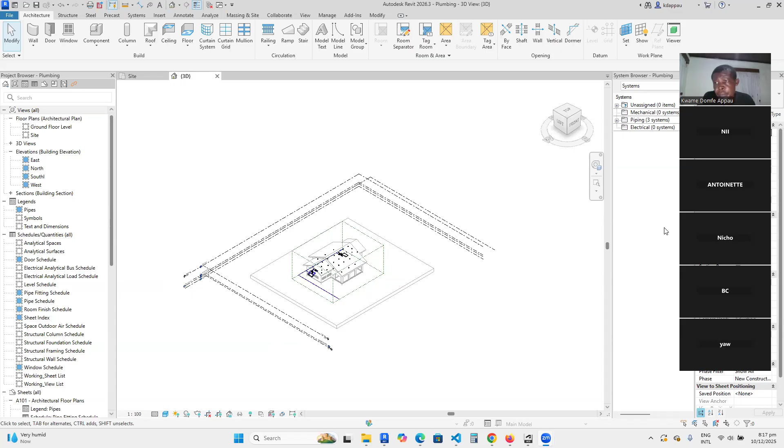Any question relating to what we did yesterday? Hello. Please, nothing from me. Okay. Any other question based upon what we did yesterday? Nicho? Yes, sir. Any question based on what we did yesterday? No, for now, I don't have a question. Any questions? So for now, no. Friday, Saturday, Sunday. So from there, I'll see what to do. Okay. Yeah, any question?

No, sir. Okay. Today, I want us to look at title blocks, because it's a very critical part of our work. We'll come back to the modeling and stuff. But I want us to look at how you can design title blocks and then how we can start populating our sheets, because creating sheets is very critical in the Revit project delivery process.

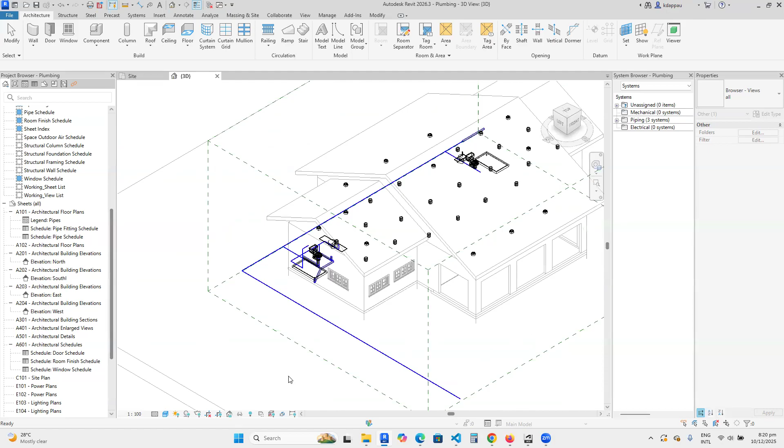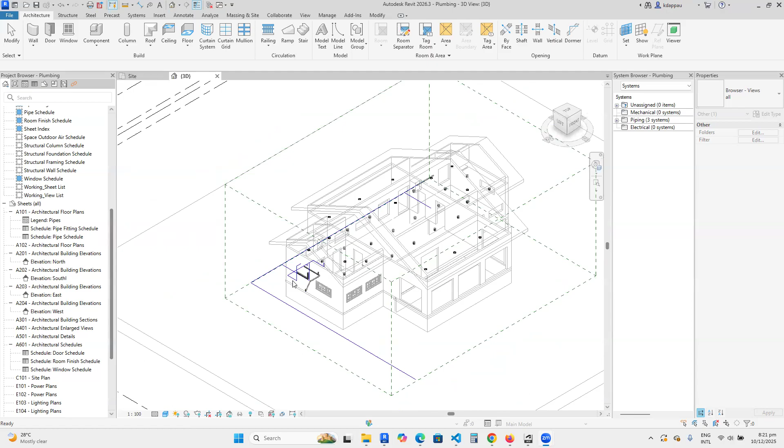Sir, please, I want to ask a question. The recordings that you have done, all that you send to us is on YouTube. So let's say I want to go to the recording day 1 or day 2 or 3, unless I go to YouTube to click on it. So that means if I don't have data, I can't go through it again. But you can download it from YouTube if you want to. If you go to YouTube, I think you can download it. Are you okay? I said you put it on YouTube, I don't have a problem about that, but maybe we can do something about it. You can easily download YouTube videos. I said you can download the videos from the YouTube channel. Okay. Yes.

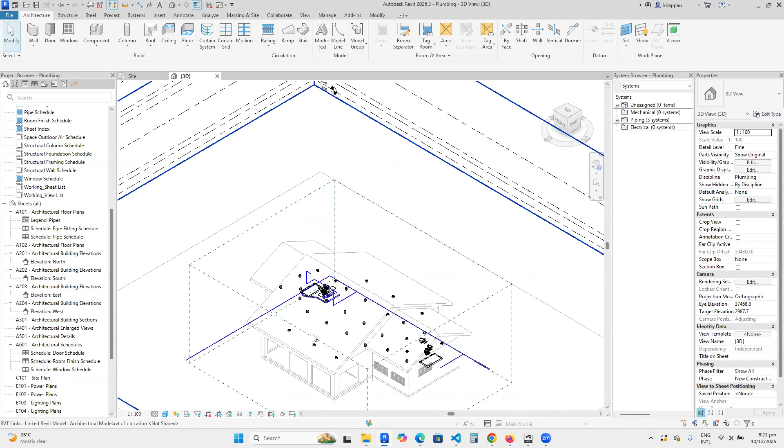Okay. I want us to focus on sheets today. How to create sheets, and then how to populate the sheets. But before you create any sheet, you need a title block. By default, Revit comes with a title block, like this one you see here. And this title block is not a title block that you can use. It's a sample title block.

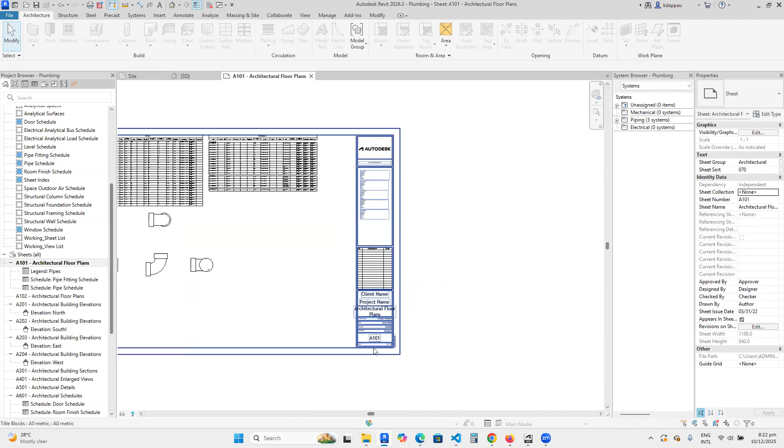But you should be able to create your own title block, and I want to show you how to create it. But I want you to observe something from this title block. If you zoom in here, we have project number here on the left, then another project number on the right. Date here, then issue date on the right. Drawn by, then author, checked by, and then checker here. Then we have this number.

If you click on this project number here, you can type it in. It's a label that you can edit. If you click on this date here, it's a label that you can edit. Author too is a label that you can edit. But what is on the left side here? You cannot edit it easily because it is a fixed text. The ones on the right are parametric labels, and the ones on the left are fixed text.

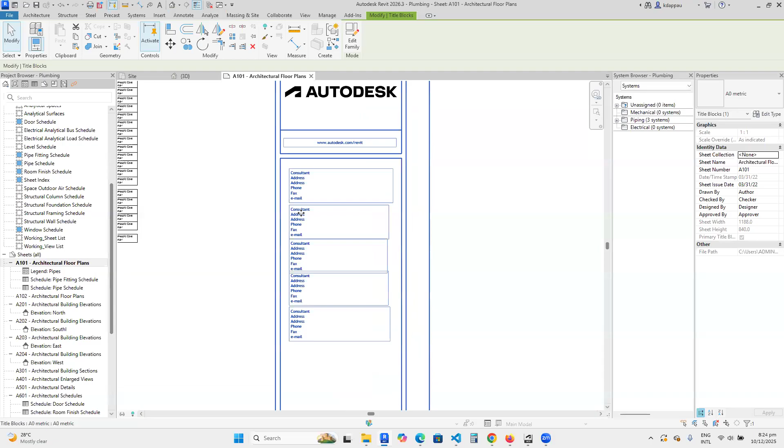This sheet number here is also a label. This scale here is also a label. Most of the content you see here is all text. You see, you cannot edit them here. When it comes to creating title blocks, text and labels are the two major things.

I've not been coughing the whole day, but I don't understand, when it gets to the evening, I start coughing.

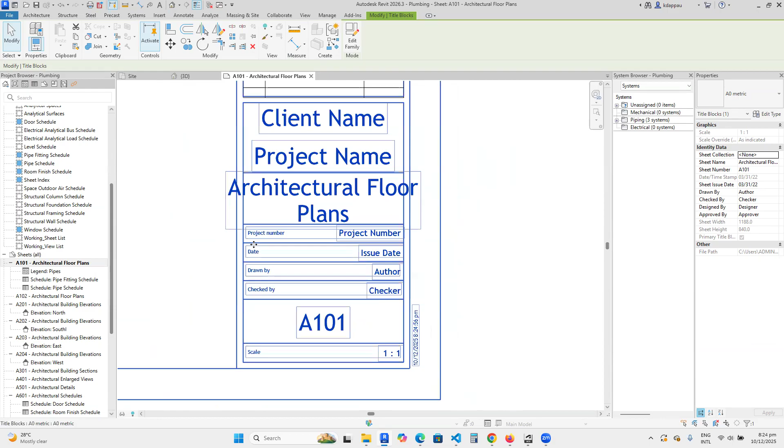The text and the labels are the two most important things you take note of. The labels are things that you can change from one project to another. The text doesn't change per project; it remains the same and fixed. So let me do a simple scenario to show you how to go about it. I'll not edit this one. I'll just start with a new title block.

I'm going to do an A2 title block to be specific. So I'll go to File, New Title Block, and I'm going to design a title block for the first time. I'll select this A2 metric title block and then go to Open.

It will open a blank sheet of A2 sheet size, as you can see. From here to here is 420 mm. From here to here is 594 mm. So it's the exact A2 sheet size that you want to work with.

And when we are working with Revit, we work with real dimensions. We don't scale anything. The only thing we scale in Revit are views and legends. We don't even scale schedules. We scale only views and we scale only legends. So with the title block, it's the exact same sheet size. But I'll not add anything. I'm going to add two things first.

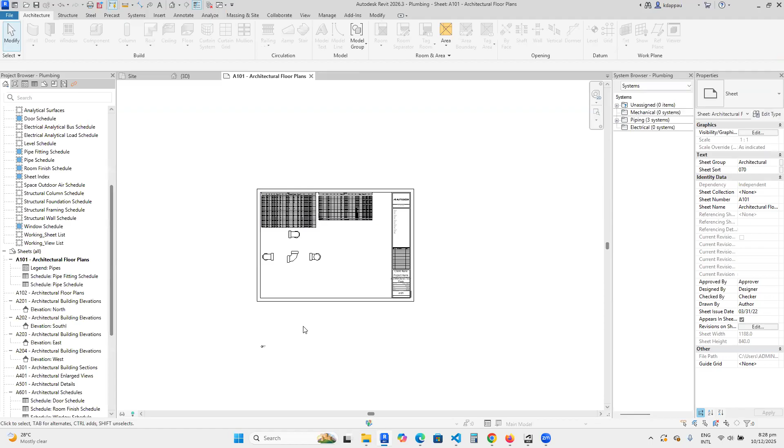So what I'm saying is that when you are designing any... Sir, please go back again from File. Okay. So I'll close it and start again. When you want to create a new title block, you go to File, New, and then choose Title Block. A dialog box will pop up. Make sure that it is metric, but look at the path: Drive C, ProgramData, Autodesk, RVT 2026, Family Templates, English, Title Blocks.

And you should see a default title block, A0 sheet, A1 sheet, A2 sheet, A3 sheet, A4 sheet. I want to create an A2 sheet, so I'll choose A2 metric. Then I'll choose Open. So it will open a new title block for me. And if you check the dimension, it's 420 by 594, the exact size of the title block.

And what I'm saying is that there are two things you should be concerned with for now. All the others will come in as add-ons, there to add value to the title block. But you need to understand two major things and the way they behave in terms of title block. It is applicable to all other tags that we look at in future. First one, I'll go to Create. And if you go to text here, let me bring my magnifier.

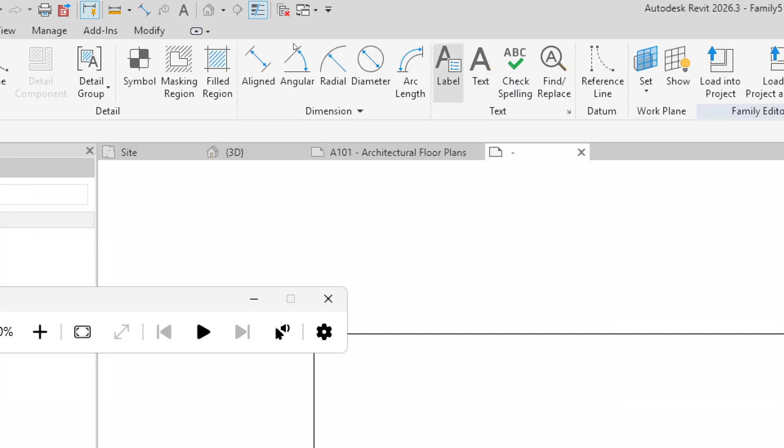Then increase it. If you go to Create text here, you see there are two things here, a label and a text. They all look like a text, but the label is parametric. This text here is not parametric, but the label is parametric. So I'm going to use the two of them for you to understand how it works. Okay, so I'll minimize.

And I'll go to Create Label. Watch closely. As soon as I click, I don't have the option to draw or to write any text, but I have the option to pick from a list, as you can see here. So there's a whole list of labels. These are all called parameters that you can load into a title block. So for instance, I can pick any of them, say client name, and then choose Add.

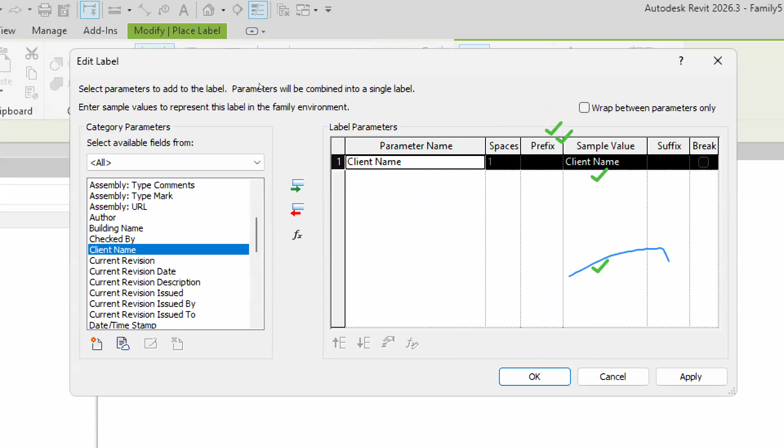When I add it, I'll get client name here. Then I'll go to OK. So you see that the client name is now loaded. Now let me minimize it again. This is a client name. This is a label. It is a text. It has a font type. It has a font name. You can give it a color. It has a font size.

But if I go in and then choose Create again and then pick Text and then click here, with the text option, I can type whatever I want. So I'll still type client name again. So I have two things: client name, and then client name. The only difference is that one is a label. If you select it, it's called a tag label. And if you select the lower one here, it's called a text, 8 mm.

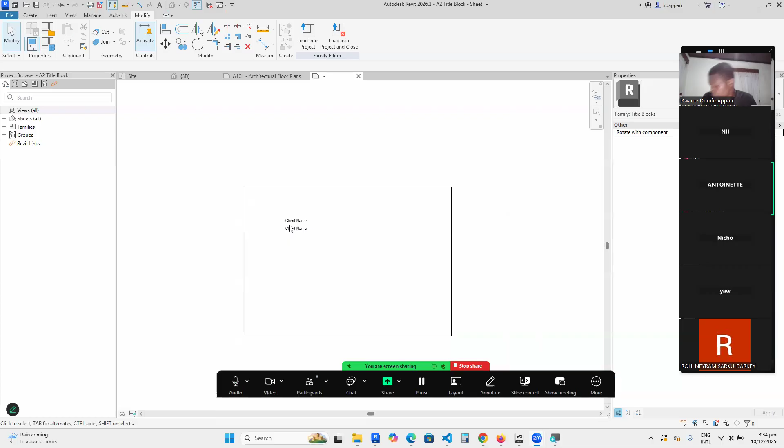So I've saved it as a file, A2 title block. Now I can load it into the project. So the title block is now loaded. So I can come and select this title block and then change it from the type properties, and then choose the A2 title block that I loaded. So that's the new title block that I've loaded. Let me shift it to the side.

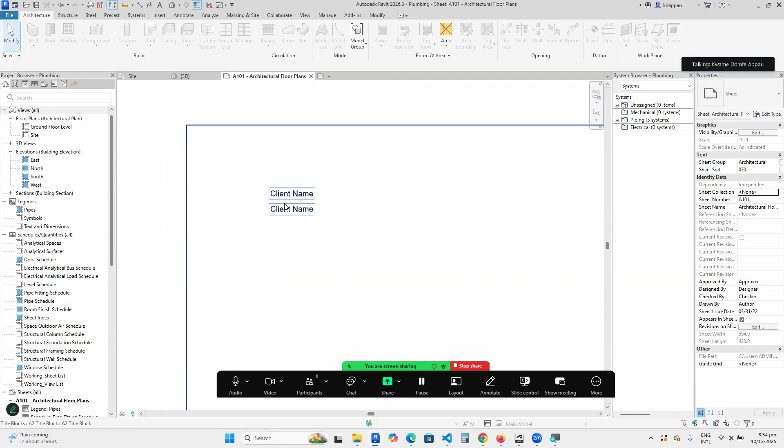This is a title block. You still see the two things here. Client name here, client name here. One of them is a text. The other is what? A label. The first one, if I click on it, we have client name, which I can edit. The second one is a text, which I cannot edit because it is not parametric, but the label is parametric. And because of that, I can what? Edit it. You understand what I'm saying?

Are you okay? Hello? Yes, sir. Are you with me? Yeah, we are. Yes, sir.

I'm okay. So know the difference between the two. At any point in time, you'll either be using a text or you'll be using a label. Know when you are using a label, know when you are using a text. This client name that you see here, if you select the title block, you should be able to see the client name somewhere and then edit it. But the question is, where do you find the client name to edit?

If you go to Manage and then go to Project Information here, you will see the client name here as a parameter. Let me magnify so that you can see. If you go to Project Information here, you will see the client name as a parameter, which you can edit. The project issue date is also a parameter you can edit. Project status is a parameter you can edit. Project address is a parameter you can edit. Project name is also a parameter you can edit. Project number is a parameter you can edit.

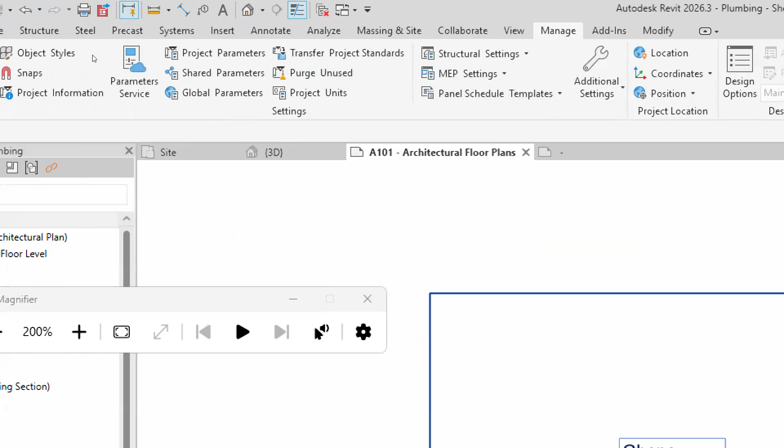If I click here and then I type in a different name and call it, let's say, Ghana government, for the client name here, it will change to Ghana government. If I go to the project information and check, you see that the name will change to what? Ghana government.

One thing I want you to understand about labels is that when you create a label, you can change the name of the label in different places and everything will be updated within the project. If you don't use a label and you use a text, it limits you. You can only change the text at the place where you created it and edited it. Any question? Any question, please?

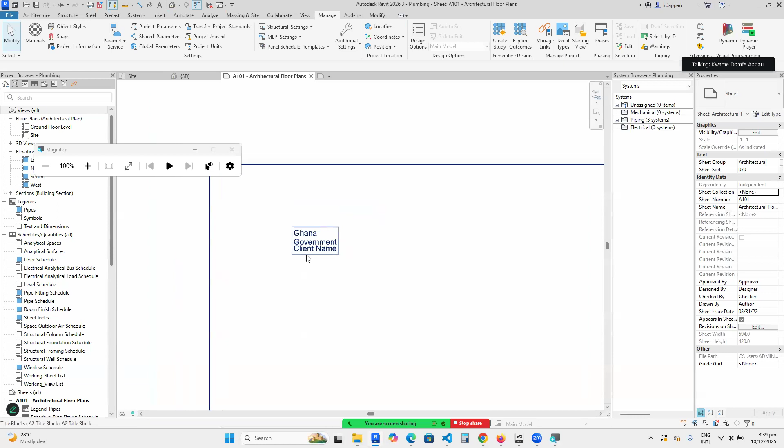No question. Now, the next thing that should concern you is this. Whether it is a label or whether it is a text, they are all text. So you can edit the font sizes. You can edit the font type. You can edit the font color. You can do anything to the font and then present it in a manner that will look presentable the way you want.

So if I select the title block again and go to Edit Family here, and I select this client name, which is a label, we have the label, then you can edit the type. This Edit Type properties gives you an opportunity to edit the structure and form of this one. So the font size, for instance, is currently 8 mm. I can duplicate it and then do, let's say, 24 mm.

But it is not only the font size you are changing. You can change the font type also. So instead of it being Arial, I can say 24 mm space bar Tahoma. You can choose any font, the kind of font you work with and you are comfortable with.

So I'll choose 24 mm Tahoma for now and I'll go to OK. So there's a new system type label called 24 mm; there's 8 mm, there's 12 mm, and then there's 24 mm Tahoma. So I can change the font from Arial to Tahoma. I can change the size to 24 mm.

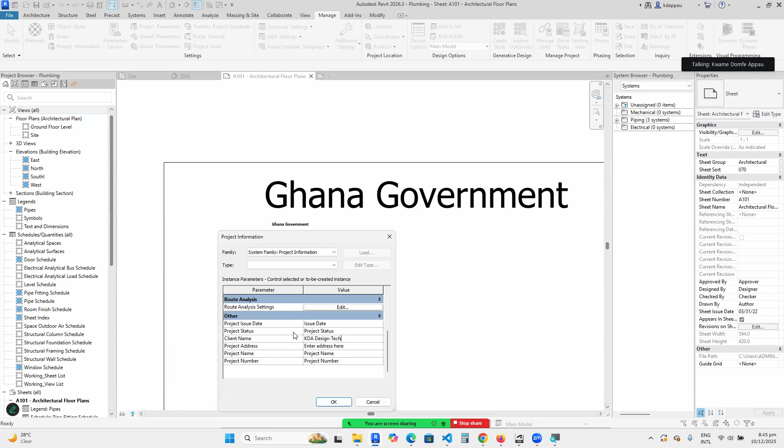So if I go back to the manage tab, go to project information, and then change the name from Ghana government to KDA Design Technologies. I'm not editing it on the title block at all. I'm editing it in the project information dialog box.

But as soon as I click OK, both of them will update to KDA Design Technologies. This one also updates to KDA Design Technologies because the two of them are parameters. But this client thing here is a text, so it doesn't change at all.

Any question? Any question? No, sir. Okay, you're okay.

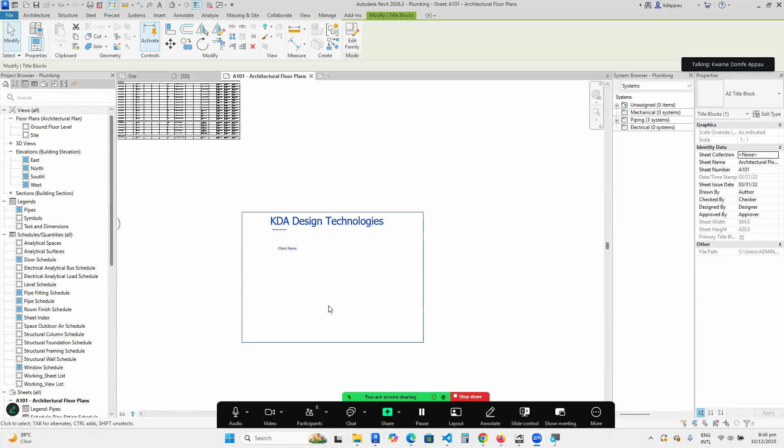Yeah, good. Now, when you are designing a title block, we work with so many parameters on a title block. You enter so much information about the project: client information, project information, site information, consultant information, the team of people who worked on the project, designed by, drawn by, you enter dates, you enter scale, you enter so many things.

So you must take your time and bring all those labels inside the title block as and when you need them. Depending upon the title block that you are going to design, you might need one label or the other. Then when you bring the labels inside, you can change the font sizes, you can change the font colors, you can change the font weight.

That is where your design ability comes in. You can design the title block in any manner to suit the way you want it. Any design that you can do in AutoCAD, you can do in Photoshop, you can do in CorelDRAW. I can assure you, you can do the same thing in Revit by just changing the font sizes, the font weight, the font colors, and so on and so forth.

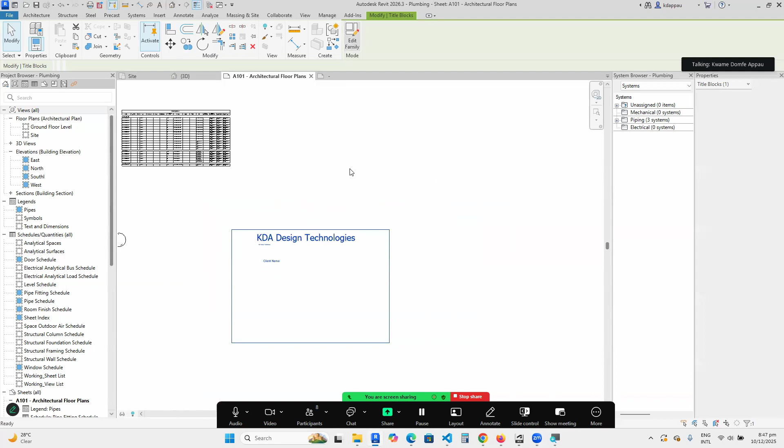So I'll go in again and I'll go and edit the family again. So if I come in here, I can take this client name and bring it to the left. I want to do a vertical title block here. So I'll take this title block. Let's say I'll draw a line from here to there. I want the distance from here to here to say 100. So everything will fall within this space.

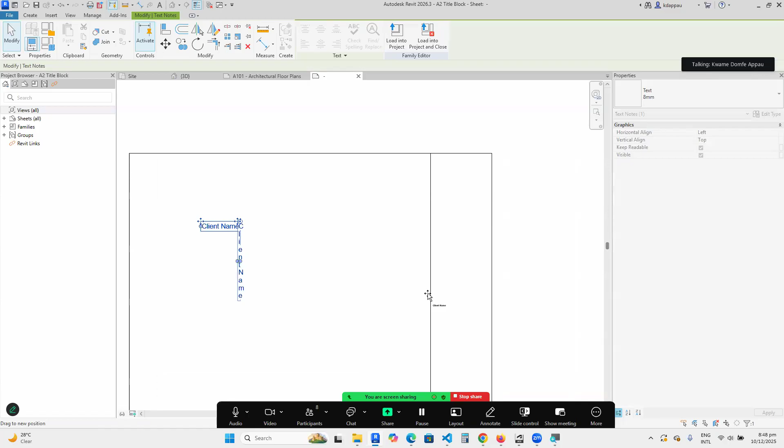So I can bring this client name here, then select it, pull it back to fall within this space. That's the client name. I'll delete this one. Then I'll take this text, bring it here on top of this client name. So if I bring it here, this is a text. The font is big, so I want to reduce that one to 2.5 mm.

So I'll go to edit type. System family is a text. The type is 8 mm. You also have 12 mm. Then you have schedule default. But I want a smaller size, 2.5 mm. So I'll duplicate it and then give it 2.5 mm.

Then I'll decide the font I want to use. I want to use Arial. Then go to OK. So I'll come in here. The font is Arial. The text size is 2.5. Then I'll go to OK. So I have this text here, which is 2.5 mm. Then I have this client name here, which is also 2.5 mm Tahoma bold.

So now, if I load into the project and I overwrite, I'll see my line that I added. I'll see my text for the client name. Then I'll see the label depicting the client name.

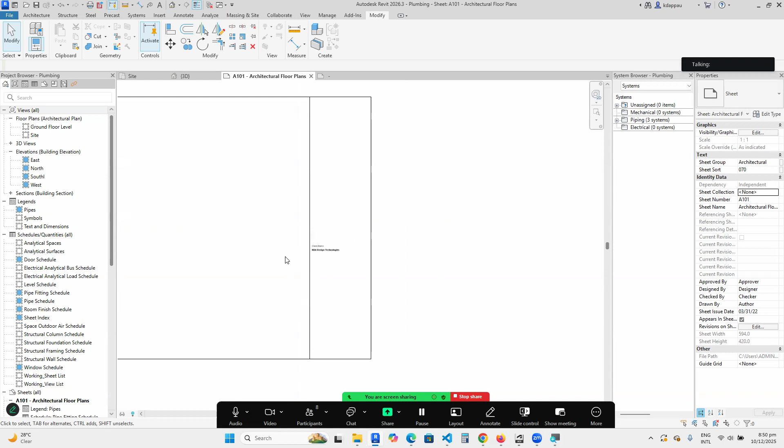Now, if you watch it closely, I have this client name here, then I have this client name here, which I can edit. But for a title block, the information comes in different blocks. So you can have client information, client address, client telephone number, client email, whatever information about the client that you want, you can bring them in.

So, sorry. What kind of sickness is this?

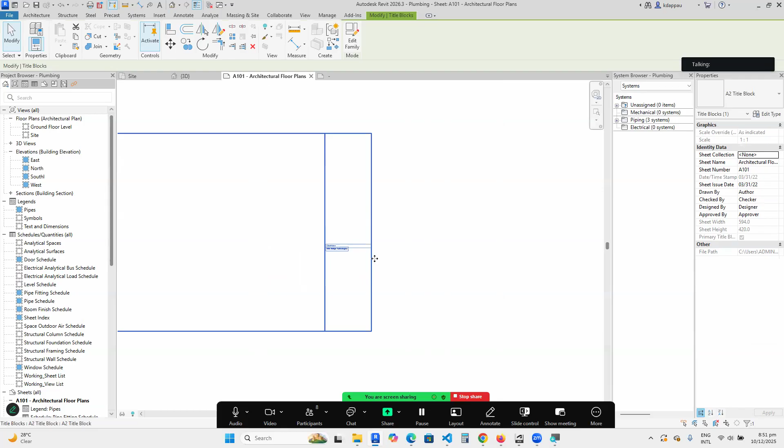I'll select this title block, go to edit again. Then I can bring in more labels. This one is a text. This one is a label. I can go and click create new label and click. Then it asks me to choose from the list. So if I go to here, we have

author, building name, checked by, client name, designed by, drawn by, file path, and so on. Project address, project name, project number, project status. I can pick any of them, let's say project name, and then choose add. When I add it, the project name will also come.

When I select the project name, the text font sizes that I've already created are available here for me to choose from. So I can choose 24 mm Tahoma. I can choose 2.5 mm Tahoma bold. If I want a different font size, I can edit type, make a duplicate, make it 5 mm Tahoma bold. Okay, then I'll come and change the font size to 5 mm, and it's Tahoma bold.

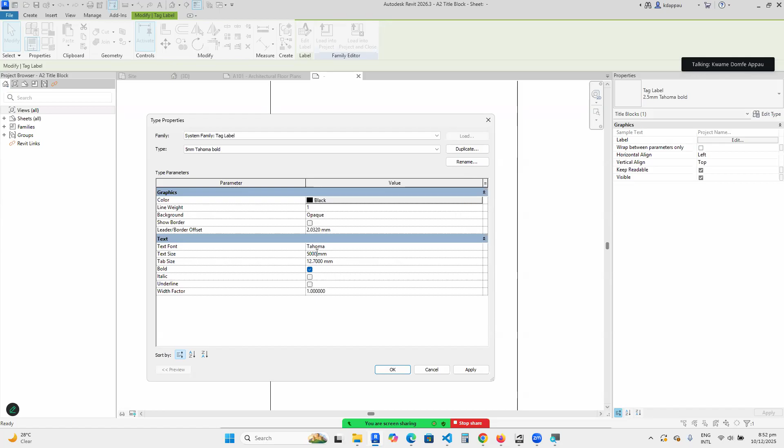Then I'll go to OK. The value is out of range. I typed 5 mm... I made 5,000. 5 mm Tahoma bold. So I'll go to OK. So now this time around, this one is 5 mm, and it's a label.

So as soon as I load it into the project and I overwrite, I'll see the project name here. This project name is the same information that I'll see in the project information here as project name, and it's the same thing. So if I change the project name here to proposed residence, I go to OK, I'll see the proposed residence here.

I can click on it and then edit it. Or I can go to the title block here. I should be able to see it on the title block. If I select this title block, okay, it's not giving me here. Sheet name, sheet number, okay, it's not here. So you can click on it here and then edit it here.

Now, if you write a proposed residence, you need to put a text here to describe what this proposed residence is. So I'll go into edit family, copy this text, which is not a label, Ctrl C, and then bring it down. And then change this one to project name. Some people write it project, some people write project name. Please, at your own discretion, do whatever you want. You can bring a colon at the back of it and then get the project name.

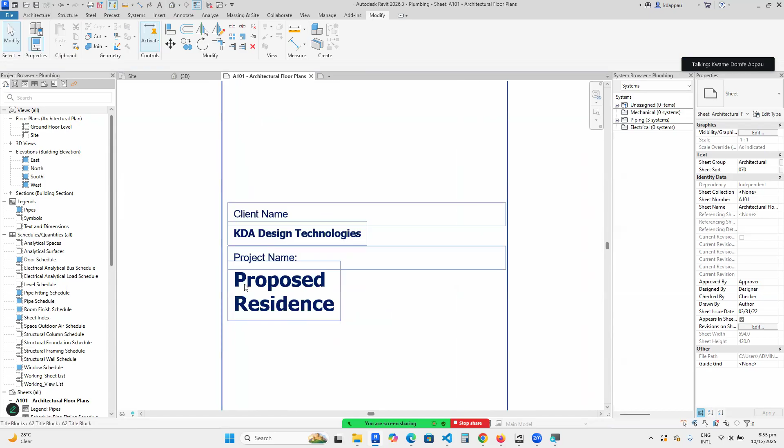Then when you save it and then load it into the project, overwrite, you see that the project name will appear. This proposed residence is falling into two lines. If I want it to be one line, I'll select it, edit family, and then pull it to the end. Now, when I load it into the project and I overwrite, I get that. Any question?

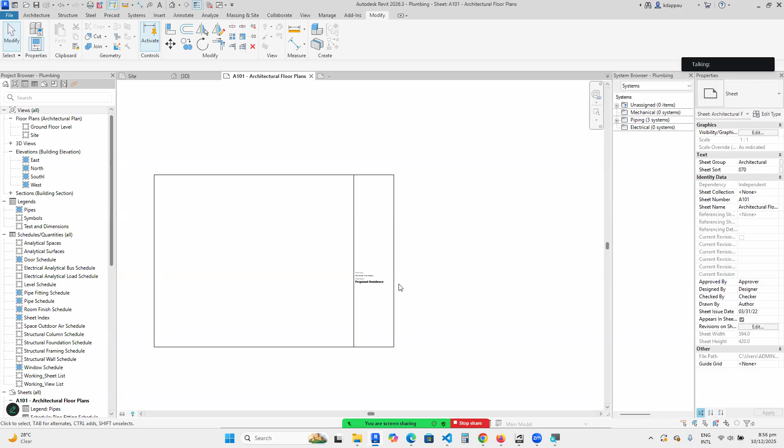Right now, I've added two parameters, one for client name, one for project name. I've added just only one text type, and I've made two instances of it, one for client name, one for project name. Any question? Any question?

Yeah. Yeah. Are you okay? Yes, sir, I'm good. Rohi. Are you okay? Rohi. Bakofi. Bakofi, are you okay? Yeah, we are okay. Ni. Sir, are you okay? Yes, sir. Nico, are you okay? Hello, Nicholas. Nico. Nico.

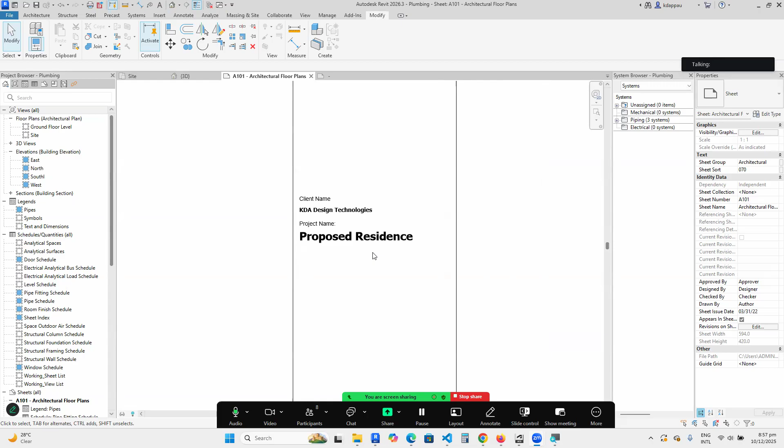Okay, let me continue. Now, if you are designing a title block, you need so many things in a title block. The client name, project name, the designer, the person who drew it, drawn by. In AutoCAD days, we have the check by and those things. In Revit, you don't have the check by. Nobody's going to check anything because it's the same team that is working on it.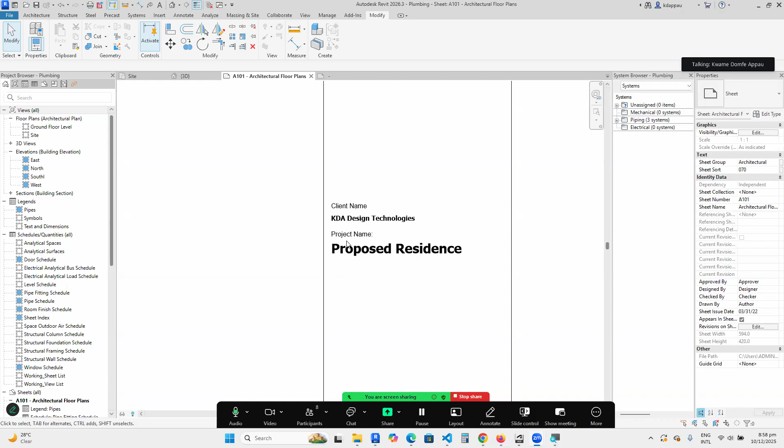In AutoCAD days, when you finish printing the work, somebody will have to sit down and then go through the work and check and make sure that everything is correct. But in Revit, you don't do that. So adding those checked by doesn't make sense of late. Then we update information. So what I'll do is that I'll go to edit. And then this text here, because there's a colon here, let me add another colon here.

Now I can copy this one, CO, and then bring it 1, 2, 3, let's say 4. I'll just do 4 items more. So what I'll do is that I'll call this one sheet name or sheet number. Sheet name. This one will be sheet number. This one will be scale. Then this one will be project issue date. Issue date.

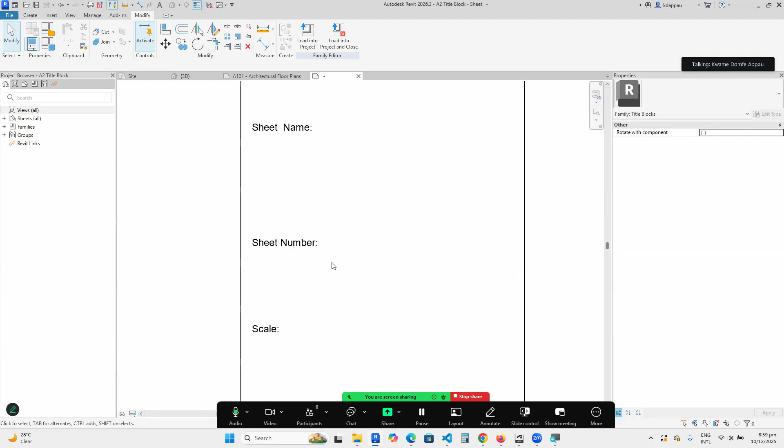And these ones, I'm just using text to describe what I want to do. And for each of them, I might bring an accompanying label for the sheet name, a label for the sheet number, a label for the scale, a label for the project issue date, for all of them. So I'll go in and then choose, this one is a label. So I can copy this label, CO, bring it here, bring it there, bring it here, and then bring it there. So that when I select this label, instead of the label being project name, I should change the label to what? Sheet name.

So I'll go to edit label, take the project name, remove it, go through this list, look for another label called what? Sheet name. And it's arranged in alphabetical order. So if I go to S, I should see sheet name here. Then I'll add. Then I'll go to OK. So now the new label here is called sheet name. This one here is a sheet number. So I'll select the project name, edit label, remove the project name, look for sheet number, add, and then go to OK. Come in here, project name here, it's not project name, I want a scale.

Edit label, remove the project name, go and look for scale, add scale. Sample, you can give a sample value. Let's say 1:100. Then go to OK. So that will give me the scale. And then project issue date. Edit label, remove the project name, and then look for project issue date. Add. Then go to OK. So your project issue date.

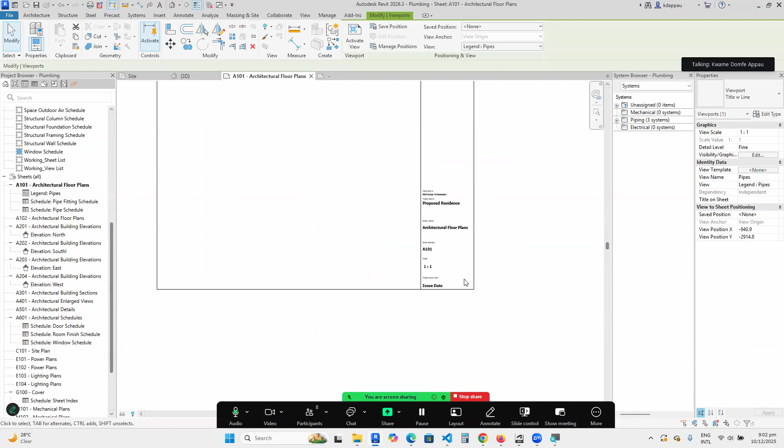Then project issue date. We've not specified the project issue date. So you can click on it and then type the date. Or you can go to manage project information, look for the project issue date, and then type in the date you want. And the date is say December 2025. Then go to OK. Then to automatically update, you can click on it here, edit it, and then make it capital letter.

So this is what you need to design a title block, labels and text. Any questions before I add on?

Any question? Rohi. Rohi. Paa Kofi. Me. Yeah, are you okay? Yeah, we are following up. They're okay. Yeah. So I'm okay. Everybody's okay.

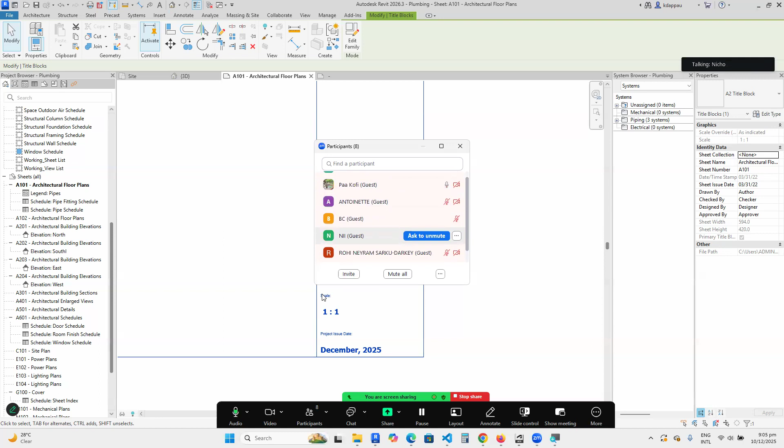Nico. Nico. Are you okay? Oh, I'm okay. You're okay. Okay. Now, all right.

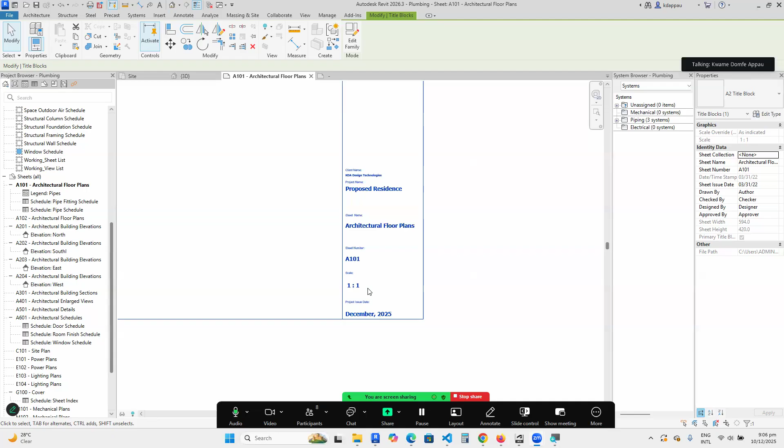Labels and text are not the only thing that you can add to a title block. You can add other graphical elements to make your title block more interesting: line work, hatch patterns, filled regions, images, schedules. Anything that you can add to make the title block more interesting, you can do that.

You can play with different font sizes. You can play with different colors. Currently, all the fonts are all black. You can make some of them colorful, blue, red, yellow, anything that you want. So let me start with filled regions or line work. I can go to edit family again.

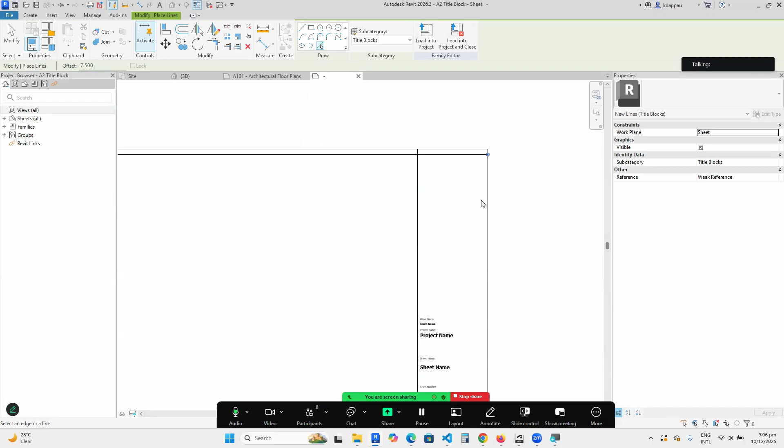Now, if you look at the title block, this is the overall size, 420 by 594. I'll offset it, create line work, choose the pick option, offset it by 7.5 mm inside, this way, 7.5, 7.5, 7.5. I'm going to bind it on this side here, so where I'm going to bind it, I'll make it about 15.

When I finish, I can trim it. Trim to corner, this and then that, this and then that, then this and then that. I can extend this one to that. Now, if you look at the outer line, that is the exact sheet size. I don't want it to be printed for any condition. So I can tab it, select all of them, go to the subcategory, and make sure that it is invisible line, so it's grayed out. And in that case, it will not be printed.

Then I can have this line work here. This line work, I can bring it all the way up here. So what will be printed will be what falls within this set of lines, as you can see. So I can select all these text here and then move it up a bit to fall inside this one.

I can go and create more line work by separating project issue dates, the scale, the sheet, the client, and then this one, so that they are grouped by date, by scale, sheet information, project information, and then client information. I can move the client information up a bit. Then move this line up a bit.

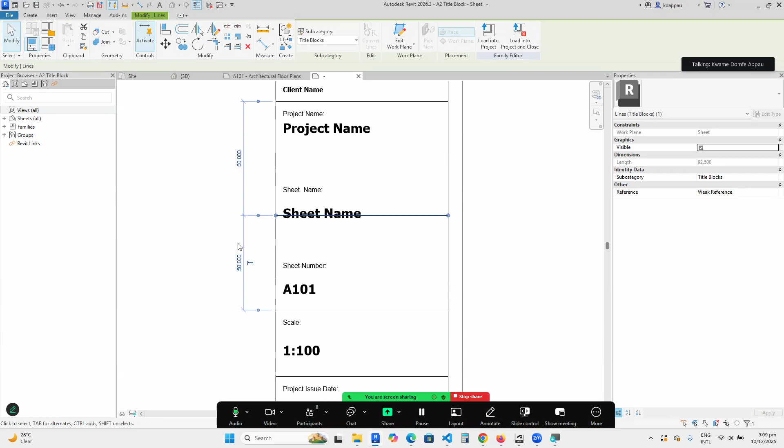If I am working, I give correct values between the spacing, let's say 30 mm, let's say 35 mm. From here, instead of 80, let me make it 75, or let's say 50. So that I can bring the sheet number and the sheet name down.

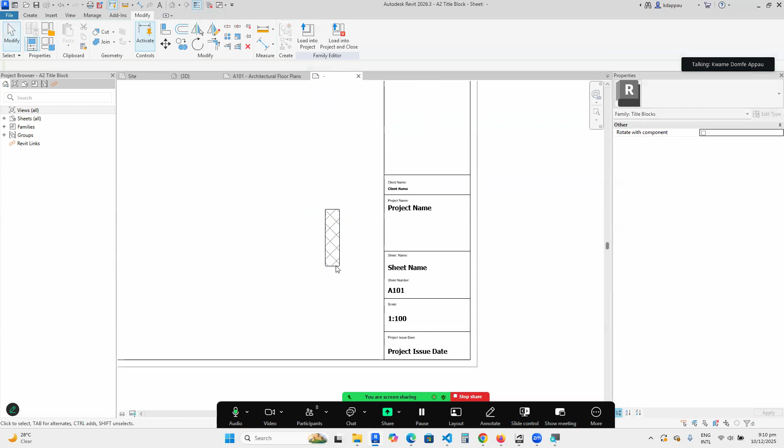You can edit the pattern. So for instance, it's filled region 1. If you go to edit type, you can make a duplicate of it and call it solid. And this solid, you can give it any color. Let's say red.

So the filled region, instead of diagonal crosshatch, I'll click on it, click this button, change it to solid fill. Then the color, change it to red. Then go to OK. Go to OK. So I have a red solid fill. This is a filled region. I can select it, create similar.

Then draw a filled region up to here, red. Give it the thickness I want. Let's say 2 exactly, or 1.5. When I finish, it will give me a filled region of red. I can copy it. Bring it here, bring it there, bring it here, bring it there.

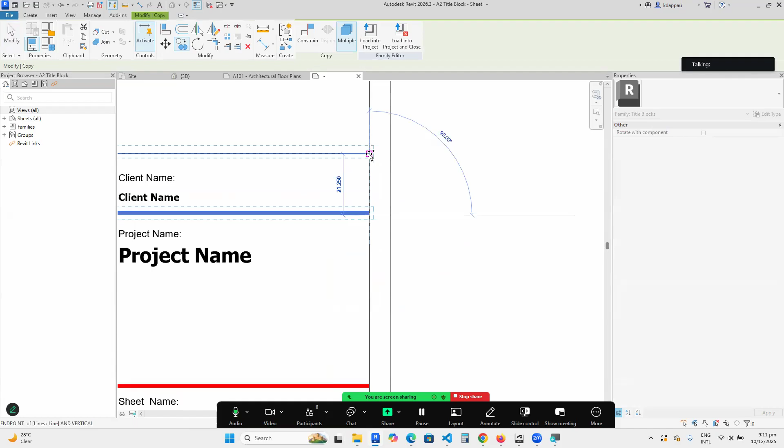If you want gray, you can take the filled region, copy it. Select this one, edit type, make a duplicate of it, call it solid gray. Change the color to gray. Go to OK. Go to OK. So it's now gray color.

So I can select this one, control, select that one, select that one, select this one, select this one. All of them are selected. Then change it to solid, gray. Then everything will be gray. I don't need this one. If you want to do it big, or you want to put it at the corner, select this, create similar. Then you can draw any shape you want.

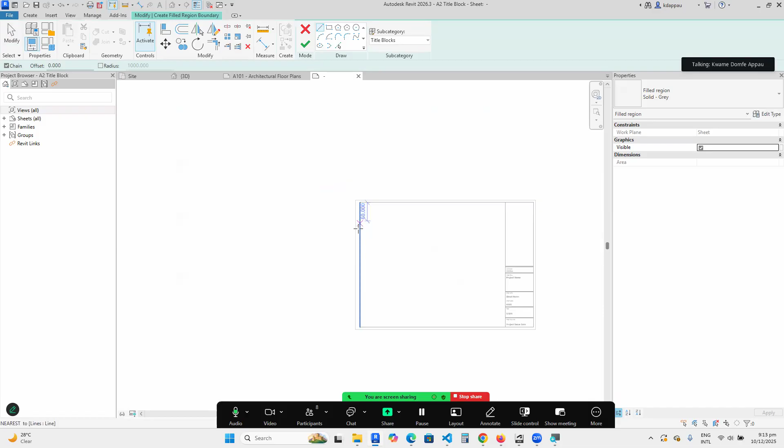Please, the title block should look professional. You can go to Pinterest and then look for title block design samples, and then work it out to look nice. Don't do anything shabby. It should look professional. So I can pick a rectangle, draw some small box here at the corner. I'm not saying do what I'm doing. I can come in here, put a small box here at the corner.

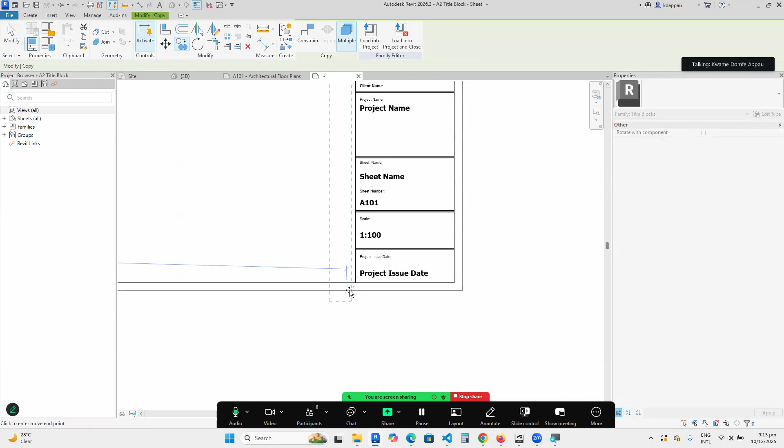When I finish, I have something gray here, something gray there. I can take this gray box, I can copy it, CO, copy from here, can put it at this corner here. So any graphic you want to work with filled region, you can do that and then add it to the title block. Any question?

No, so far I have no question. Yeah, I think I'm okay.

Okay. So you can design your title blocks. As simple as that. The next thing is you can also bring in an image. Maybe you have a logo you work with, a company logo, or your personal logo you designed as an image. You can go to insert menu. When you go to insert, you can import image. Import image. Then you can go to desktop,

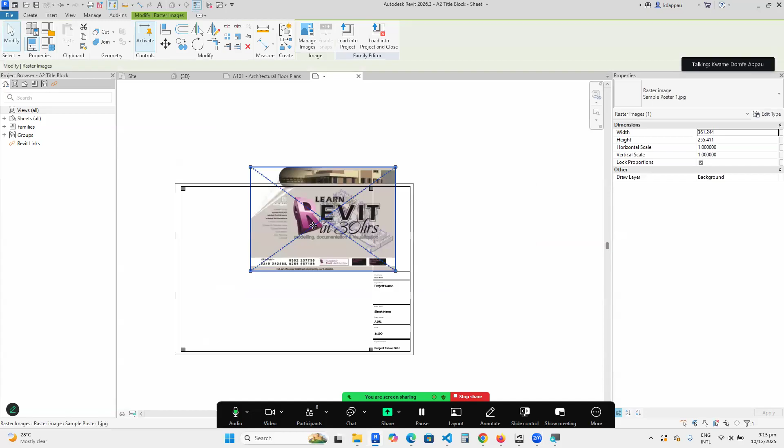go to Revit Essentials Training, take poster 1, go to open. Then the image will come. Then you can place it. You can size the image, make it smaller, and then position it wherever you want to place it. And then add the image to it.

It can be 2 images, it can be 3 images, any number of images you want to add to your title block. When you finish and then load it into the project, overwrite, you have a well-designed title block that you can work with. Any question?

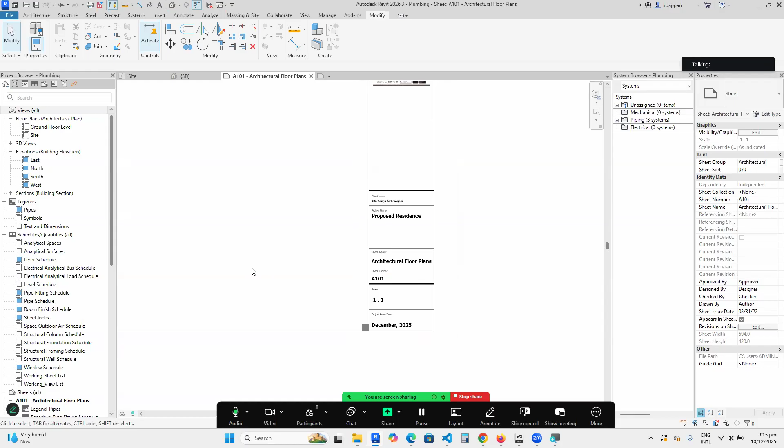Load image drawings onto a Revit title block and then print it or something? You say what? Like loading image drawings, drawings that have been detailed and then made into images, then load it onto the title block. No, not that. We are talking of the title block design as it is.

The title block is common throughout your project. All the projects that you are going to work with, we are using the same title block. The views you are bringing onto a title block, those are different things. I'm concerned with the design of the title block. So basically, it's just a logo that you can bring in onto your title block, not a project image or something of the sort.

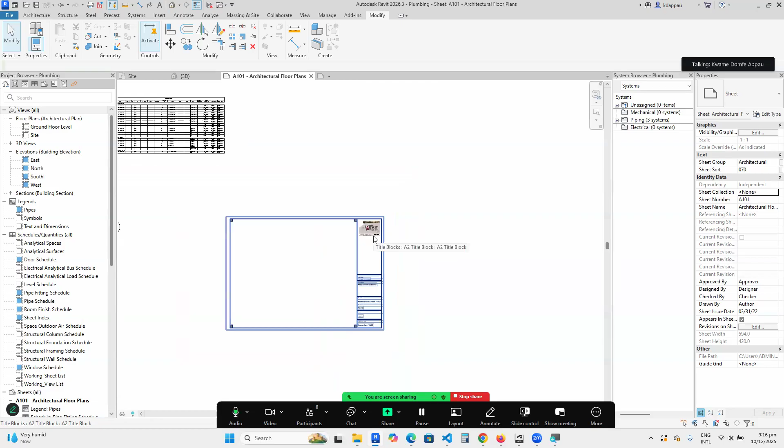All right, thanks very much. You're okay? Yeah, I'm okay. Any question? Any further question? Rohi. Rohi Naram. I can't hear you. There's something wrong. Yeah. Are you okay? Yes, please. You're following now. Janet, are you okay? Yes, sir.

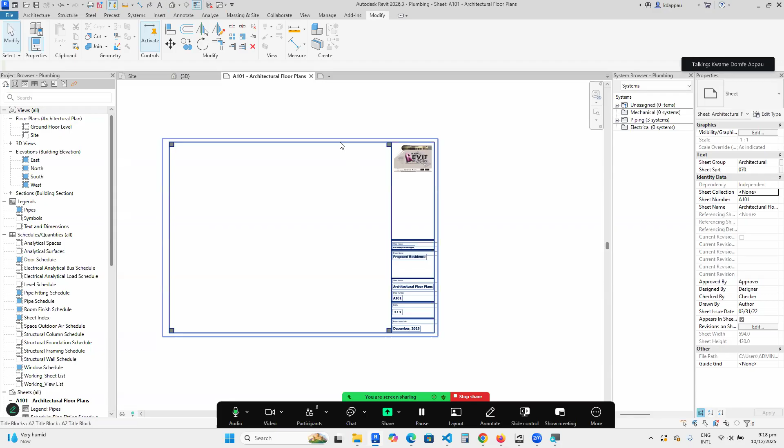Okay. Now, this one is just one title block that I have designed, a landscape title block with a vertical design. I can design a horizontal one. I can get a title block like this one and design it horizontally also. You understand? So I can take this title block, edit family, then go to file, save as family.

Then instead of just calling it A2 title block, I'll call it A2 vertical, or A2 landscape. That's the proper name. A2 landscape vertical title block. I'll save it that way.

When I finish, I can also go to file, save as family. A2 landscape horizontal title block.

And because it is a horizontal title block, I'll move the scale. Control Z. I'll set the scale and then move it to the side here. I'll adjust it a bit. I'll adjust this one, then move it to the right. I'll take the sheet name and bring it here because it's horizontal. I'll take the sheet number.

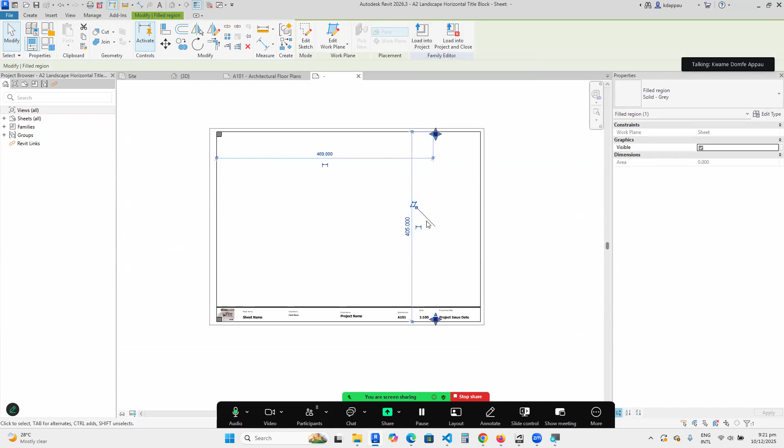So this one will give me a horizontal title block. This one, edit it. I don't need this one. I don't need that one. So this one gives me a horizontal title block, A2 landscape. Are you okay? Then I'll save it. Then I can load that one also into my project so that you see that within the project, I now have two title blocks.

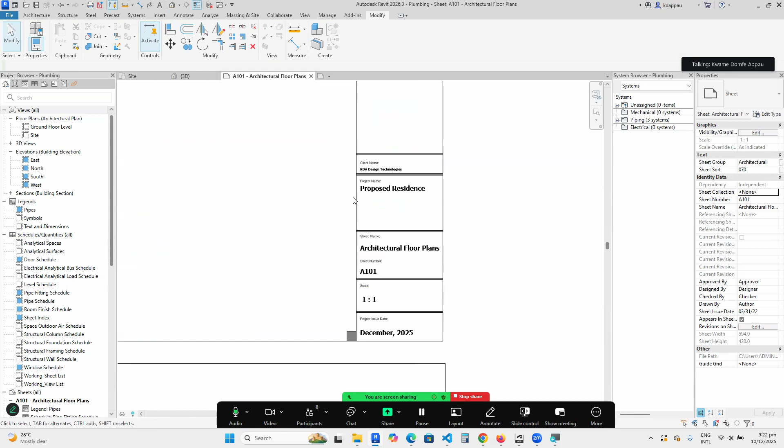One is vertical design. One is what? Horizontal design. And this title block, I can come back and edit it, fine tune it, and then make it better. This one, I can come back, edit it, fine tune it, and then make it better. Now I need a portrait title block also.

So I'll go to this title block, go to File, Save As, Family. I'll call it A2 Portrait horizontal title block, save. So I want it horizontal, but this time I want it what? Portrait. Because I want it portrait, the distance from here to here up to end here will not be 594, but it will be 420. And then the distance from here to here will not be 420, but it will be 594.

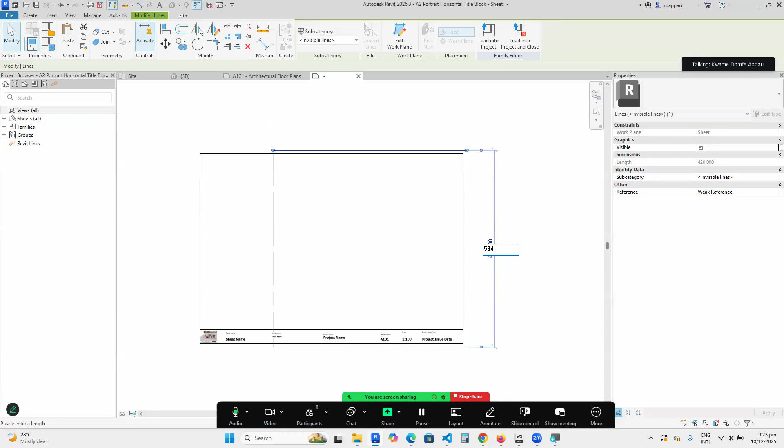Okay. Then I can adjust this one inside. I can adjust this one up. So here will be 7.5. I can make here, maybe I'll bind it on this side, I'll make it 1.5. Then I need to adjust some of these things so that it will fit. So for instance, I can bring this one up a bit. Delete this one. Project issue date, I can bring it down. The scale, I can bring it on top of this one. Bring this one on top a bit.

Take this sheet number, bring it here. Take this project name, bring it inside. Take this client name, bring it also inside. Or let me bring it on top of the project name. And then the sheet name will come in here. And then I'll take my logo and put it at this corner. Then I'll adjust this one. So I have a portrait title block now. A2 portrait with a horizontal title block.

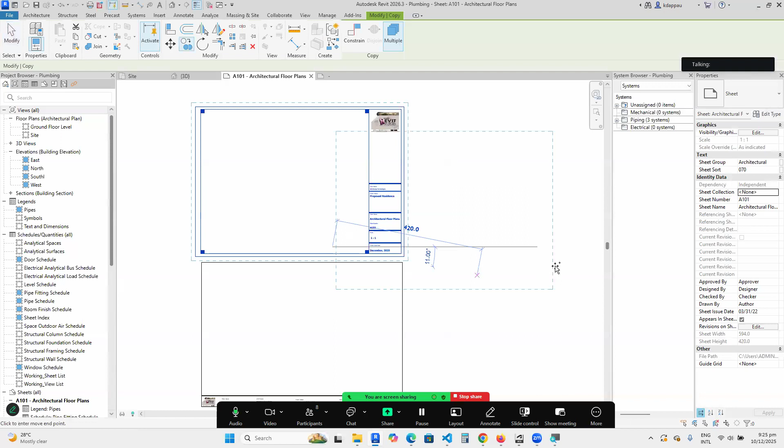Then I can load that one into the project. So when I come in here, that title block too will come. So if I take this one, I can copy it to the side and then change it to A2 portrait horizontal. You see, when you are doing some of these things, it takes time to do them, but it is worth the time because when you do it, you will not do it again. Anytime you need it, you can always select it, which I'm going to demonstrate.

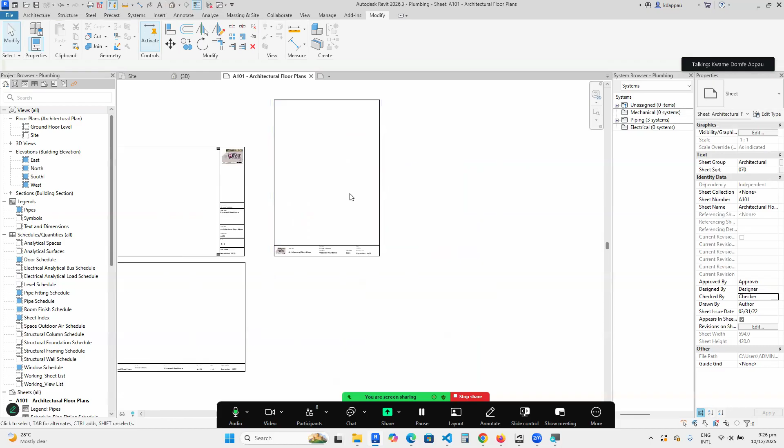So right now, I'll need this portrait title block also. I'll need the vertical one for the side here. So I'll take this one, edit family, file, save as family, and then call it A2 portrait vertical title block. I'll save it. So in this case, I want it vertical, so I can arrange sheet number. I can select the sheet number here, bring it on top, select everything here, bring it to the side, select everything here, bring it here, select this one, bring it there.

Take this line, rotate it 180 degrees or 90 degrees. Make sure it's about 100 from the side. I can adjust it to come and meet this one. I can even just bring it somewhere here. This design, I can edit it later on. So this one gives me A2 portrait vertical title block. And then I'll load that one also into the project.

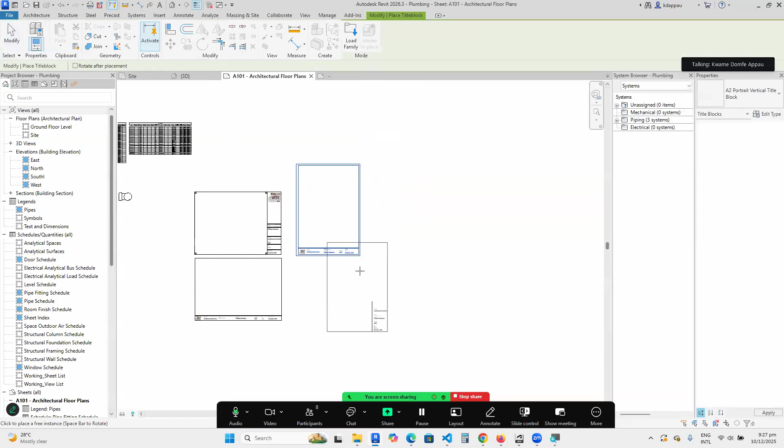So if you look at it, I have these two title blocks, which are portraits. I have these two title blocks also, which are what? Landscape. Now, anytime I want to create any sheet, I can use any of them. Any question?

No question. Yeah. So between me and you, each one of us can design his or her own title block. Do you have that agreement? Yes, sir. You are okay.

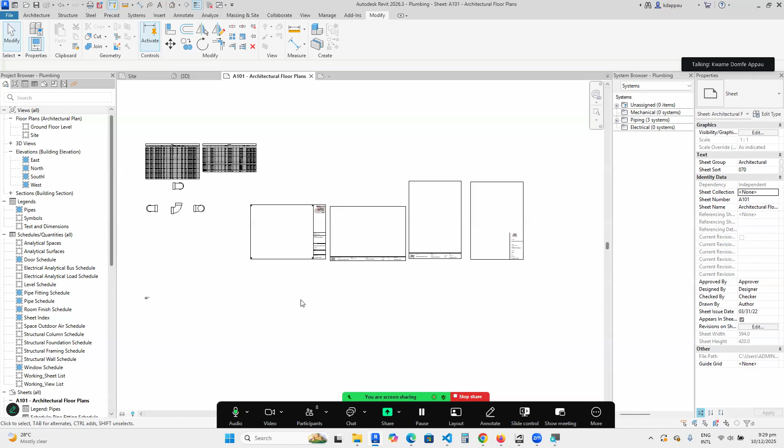Good. So now, if I select this title block, the old A0 metric one, I don't need this title block again in my work, the default one. So it should not appear in my file at all whatsoever. So I'll select this title block, right click, select all instances in entire project. If you check the filter, it's about 21 of them inside.

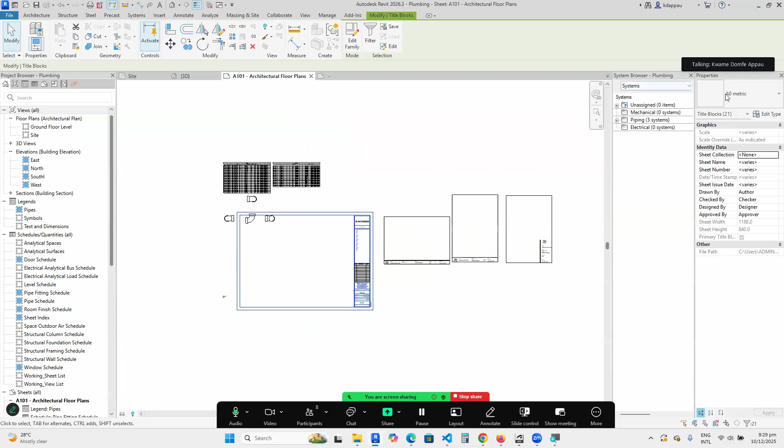Then I'll change it to the one I've created, A2 landscape horizontal. So I don't have that title block at all in my project again. Now, if I open any sheet, they are changed. So the Autodesk title block is no more available in my work.

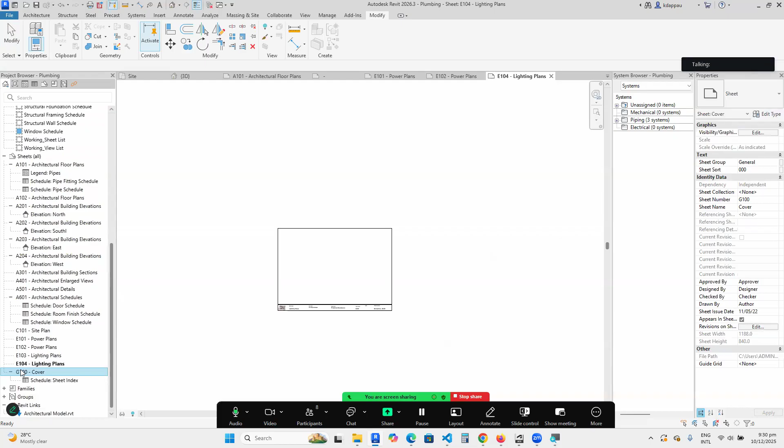Now, the next assignment we are going to do is how to create sheets based upon these title blocks. So I'm going to delete all the existing sheets from the project. Every sheet that is loaded, I'm deleting everything, and show you the proper way to create sheets in Revit. So currently, if you come in here, there's no sheet, okay? Not a single sheet inside it at all.

So how do we create a sheet in Revit? To create a sheet, you right click sheet and then choose new sheet. When you choose new sheet, you see all the loaded title blocks available to you. A2 landscape horizontal, A2 portrait horizontal, A2 portrait vertical, and then A2 title block. Now, this A0 metric cover, A1 metric, and these three, I don't need them. I didn't create them.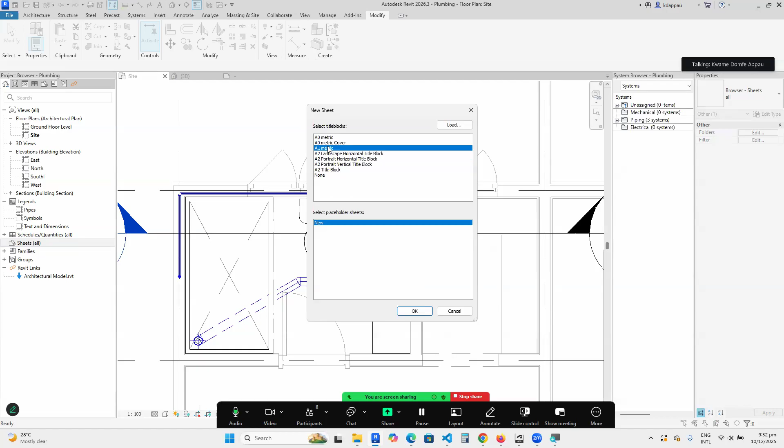So I have to remove them from the project so they don't become a distraction whilst I am working. Maybe I call somebody to come and help me with the work. I don't want that person to make a mistake of selecting that particular title block. So I'll go to my families, look for title blocks.

Charlie, it's not easy.

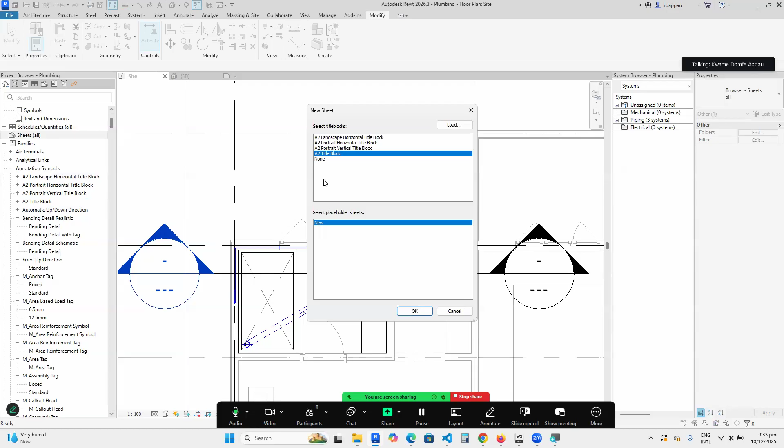Annotation, A0 metric, delete. A0 metric cover, delete. A1 metric, delete. So we have A2, A2, A2, A2. That's it. So if I go to new sheet here, now I can only see my title blocks and nothing more. I can then choose OK. Then a new sheet will be created.

Based upon what I have created, you can go again to new, choose another title block and go to OK. If you select the title block, you can go to the type selector and change it to horizontal, change it to portrait, change it to this one, or that one, whichever way you want.

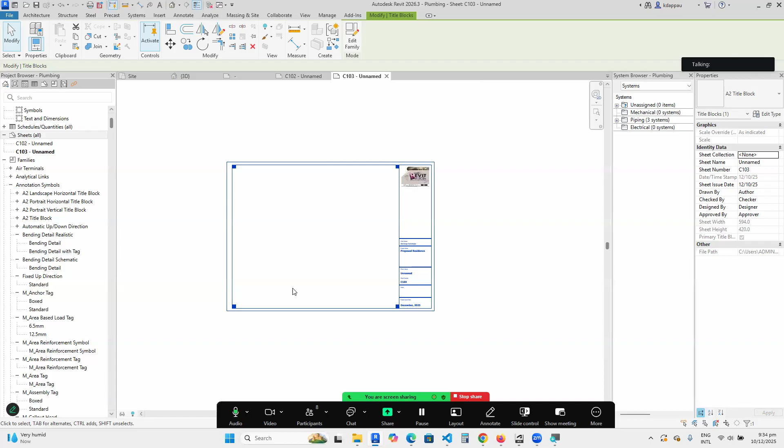But in the process of creating sheets, take note of what I'm going to tell you. You don't always have to right-click, new sheet, select A2 title block, then go to OK. If you are producing, let's say, 70 sheets or 50 sheets in a project, then right-clicking new sheet and coming to rename them, giving them numbers, it's a hell of a problem. It will not help you.

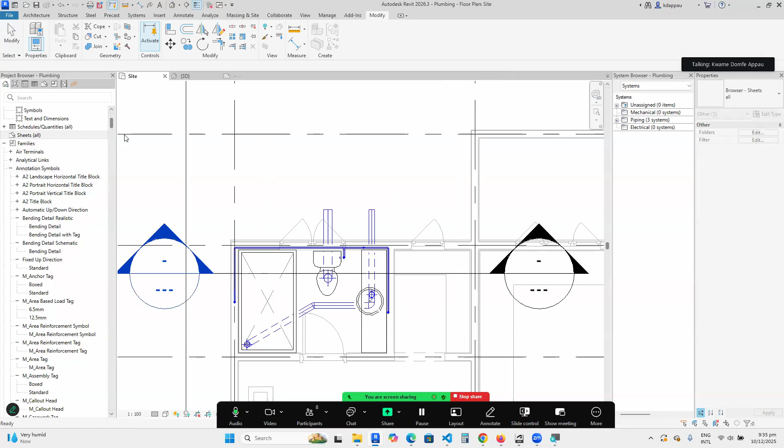So I'll delete all this and show you the better approach using schedules. There's something we call sheet lists. A list of sheets.

Sir, I want to ask, as you have done the A2 title block, if you want to do A3, the same procedure? Yes. So you have to take your time, design A3, A2, A4, A1, A0 title blocks, if you know you are going to work with them. Nobody will design them for you, and you always need them. So the title blocks you think you always need, take your time, design them, and put them down. When you get challenges, let me know.

Is your question answered? Yes, sir. So the title block design there, whether you like it or not, you do them always.

But when it comes to creating sheets, if you want to go and right-click new sheet, sheet 1, rename it, give it a number, it's a waste of time. It will not help you. So I'm going to teach you a method called the sheet list. All the sheets that you think you need in your project: general arrangement sheets, detail sheets, 3D sheets, schedule sheets, and so on and so forth.

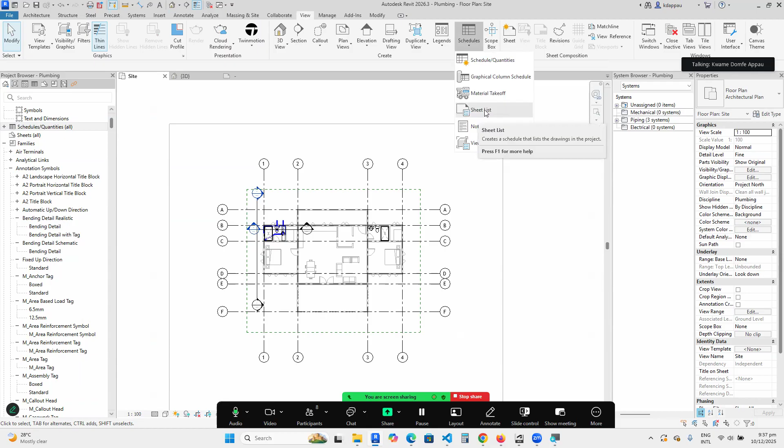So the best way to do it is to go to schedules and right-click new sheet list. You see it here, new sheet list. Or you go to the view menu and then look for schedules. You should see sheet list here. A dialog box will pop up for you to create a sheet list.

Now, with the sheet list, you will need to include the sheet name and then the sheet numbers you need. There are so many things that can come. For now, let's start with just sheet name and then sheet number. You can add the sheet height, sheet scale, drawn by, designed by, but for now, let's just do the name and then the number. Later on, you update it. So the sheet number will come first, and then the sheet name second. Then I'll go to OK.

So it will give you a schedule here. A blank schedule. There's nothing inside. Let me magnify so that you can see. You only have a sheet number here and then a sheet name. Now, when you get this empty schedule, you go to rows, insert data row. As soon as you get this one, you will get the opportunity to define your own sheet number and your own sheet name.

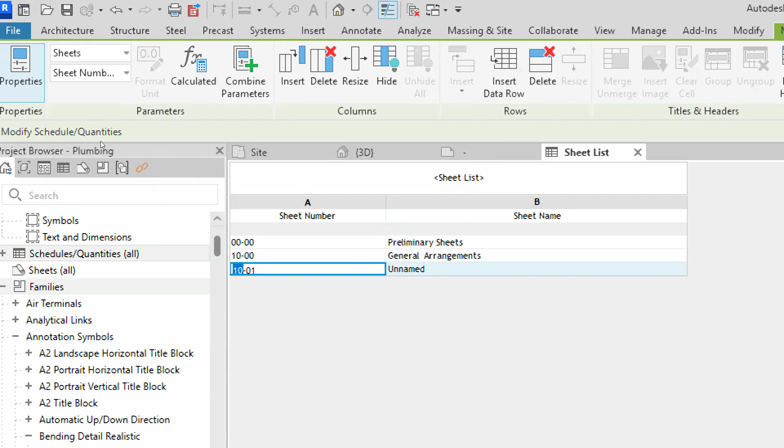Then I'll insert another row, 20-00. That one will be details. These sheets are common to every project. I'm giving the major headings of sheets that we need. Insert again, 30-00. Now this will be schedules.

Then another group, 40-00. Now this will be 3D impressions, renderings, exterior, interior. Renderings. I think I left another one out. Insert. Let's say 50-00. Site information.

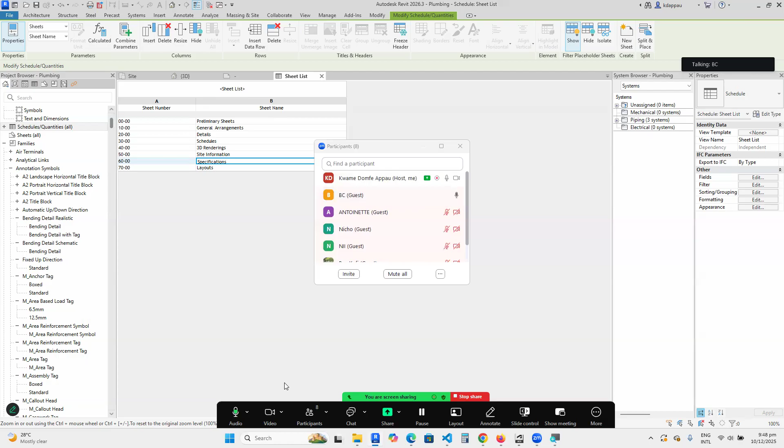Now, the next thing you need to do is rearrange them well. You understand? So you know which one comes first, which one comes second, which one comes third. This site information, for instance, should come before the general arrangement. Then after general arrangement, the details can come. Then after the details, the layout can come. Okay, so I need to renumber them properly so that they follow well.

But let me sort it so that it will be properly sorted. I want to sort it by sheet number. Okay. So the preliminary sheet will come first. Then the second will be site information. After site information, then we come to general arrangement. So these details can be 30. And then the general arrangement can be 20.

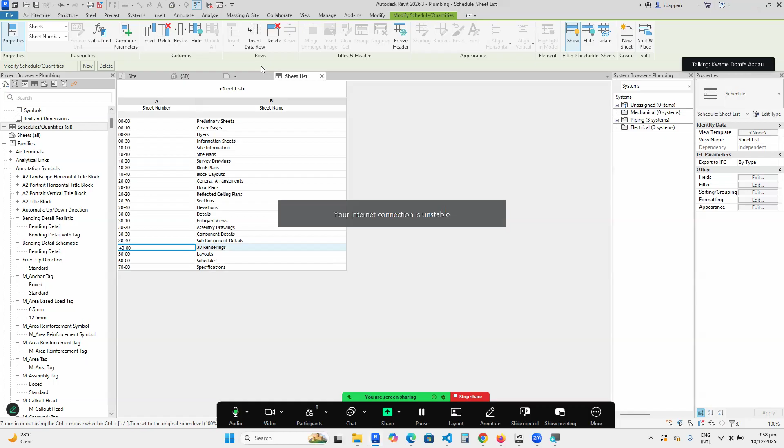Then you go to renderings, 3D renderings. Insert 40-10. 40-10 will be exterior renderings. Insert interior renderings. Now we go to layout. Insert 50-10.

Sir? Yes, sir. We can't see your screen. We can't see your screen. Okay. Can I see it? You can see it now. Yes, sir. Okay, but please, are you following what I'm doing? Yes, sir. For now, you continue. We will go over the video again. Okay.

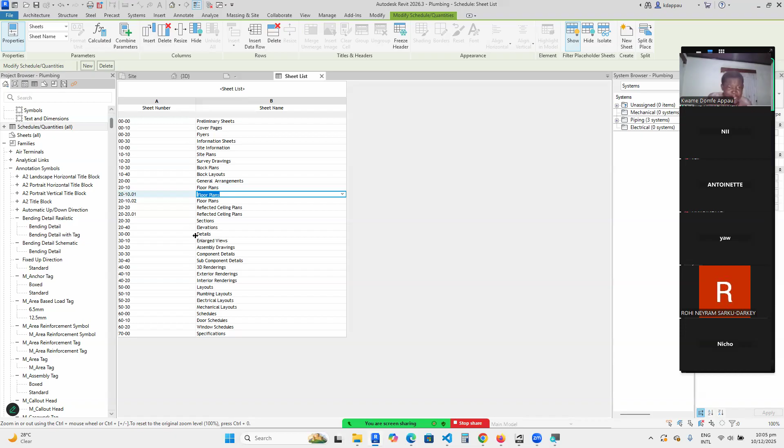So if I want to create elevation sheets, I'll go to 20-40, then I'll do .01 Elevations 1, .02 Elevations 2. Are you okay? Now that I have this list, if I want to create a sheet in my project, I'll not do it today, we'll do it tomorrow because time is fast spent. If I want to create a sheet in my project, this list is already created. I'm done with it. I'm not going to repeat this process again for the rest of my life. Any new project that I work on, this list is always there for me to rely upon.

So I'll just go to Sheets, minimize this one, go to Sheets, and right-click New Sheet. If I go to New Sheet, my title blocks are already there. So I'll choose the title block I want, A2 title block. Then all the lists that I've done here, the sheet I want to create, for instance, if I want to create Floor Plans 01, I'll just select that one and I'll go to OK. Then that sheet is created for me. The sheet number will be there. The sheet name will be there. Then I'll just drag my view and put it on it.

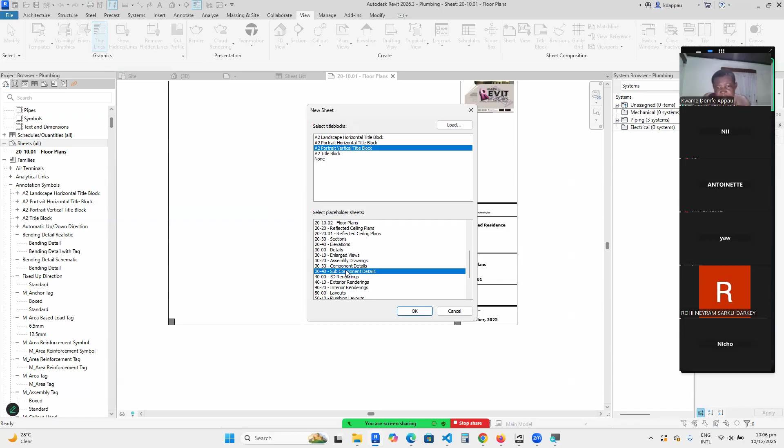As simple as that. Anytime I want to create another sheet, new sheet again, I'll go to the list. Is it layout I want to create? Is it detail I want to create? I'll come in here, select it, and then go to OK, then it will be created for me. That's the whole idea. Any question? We call this list a placeholder sheet list. It helps you to organize your sheets across different projects. And this one will be saved within your template. So anytime you work, this sheet list will always be there for you to work with. Then you can always select from the list and create the sheet that you need for any project. Any question?

Antoinette, do you understand what I'm saying? What's the meaning of... I heard you, you are confused. A little bit, but I'll be okay. Biovi, do you get the concept? Yeah, I get the concept.

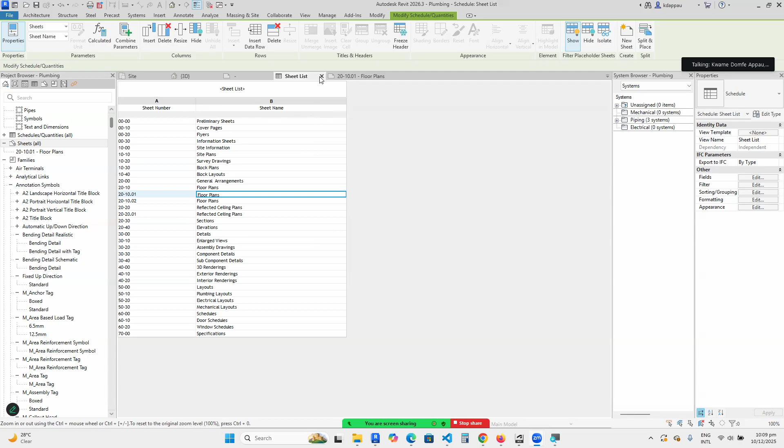Yes, sir. I beg you, this kind of cough of yours, find someone here to massage your throat for you, because it can't continue. You want my wife to punish me? You should buy paracetamol or something. Which one? This one? At least a cold mixture can do. He said he has taken so much medicine, but it's still not going. Thank you. Is that the right direction?